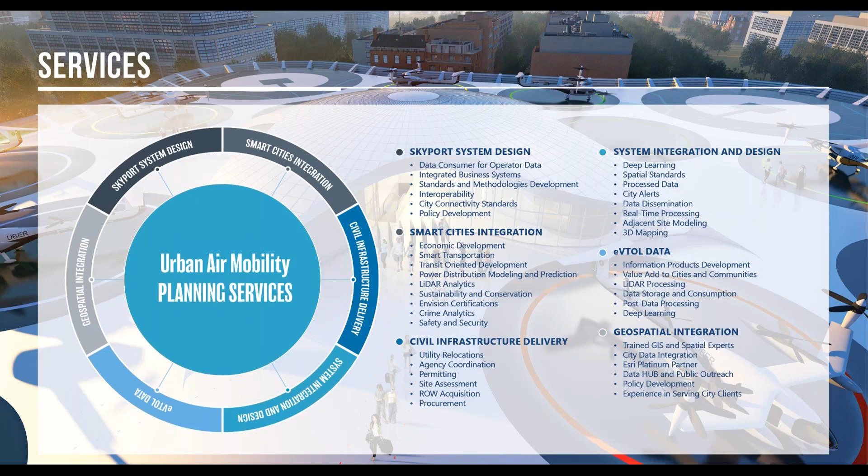Focusing on transportation and infrastructure, we are excited to be part of this transportation revolution. As a trailblazer in urban air mobility infrastructure, we offer developers, transportation authorities, and eVTOL operators a design partnership that can help make this emerging industry possible. Our solutions are designed to be flexible and modular while maximizing safety, sustainability, and passenger comfort. We design with smart components that promote efficiency and integrate into smart city plans for the future. We're proud to be thought leaders in reshaping our communities for the better.

So in the past I've discussed some of the life safety codes, the HVAC, the electrical, and fire protection systems that may affect vertiport designs. In this presentation, I plan to highlight some of the building code considerations.

Please note that building codes are adopted by each jurisdiction, and any community may choose to adopt different editions or apply more stringent requirements than the latest IBC edition. The current version of the IBC is 2018. Not all states have adopted the 2018 version, but all states have adopted most parts of some version of IBC. There are about 15 states that have adopted the 2018 version, and that changes every year.

There are 35 chapters that cover materials, interiors, life safety, types of construction, elevators, plumbing, and many more. The important thing to note is that the IBC covers both prescriptive and performance-related requirements. In addition to the IBC, these are some of the other code agencies that may develop prescriptive or performance-based standards for the design of building systems.

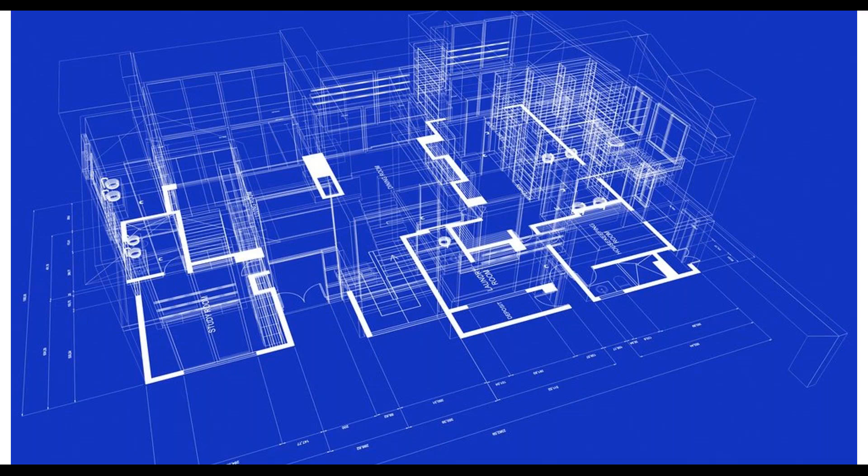Evaluating those same conditions and modifying an existing building to meet those requirements will present a greater challenge. So questions like, if a building was built before 1990, it may not meet our current seismic requirements.

On October 17, 1989, the Loma Prieta earthquake struck near San Francisco. A 6.9 magnitude earthquake, it caused nearly $6 billion in property damage. And in 1990, the code agencies set to work redefining seismic requirements to reduce the impact of future earthquakes. So if you take a look around and consider how much of our built environment was constructed before 1990, you'll see that it exceeds the construction in the 30 years since.

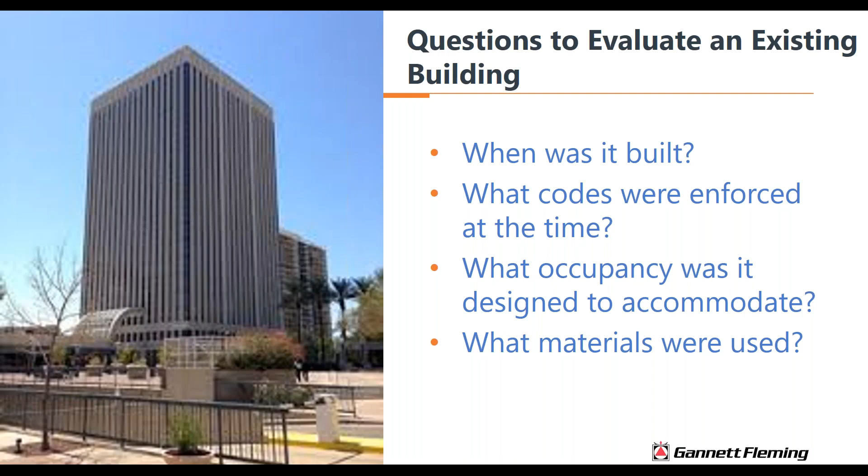So let's get into some of the specific IBC sections. According to the 1968 building code, a high-rise structure was any building at least 75 feet in height measured from the curb. According to the Encyclopedia Britannica, a high-rise building is any building tall enough to require the use of an elevator. Still, other definitions classify anything less than 115 feet as a low-rise. But since we're following the IBC, per the 2018 IBC, a high-rise must have an occupied floor at least 75 feet above the lowest level of fire department access, and not more than 420 feet, because anything over 420 feet is a super high-rise that has a different set of rules.

From some of the things we've heard about eVTOL operation in urban downtown centers, to reduce wind shear and influence, a vertipad may need to be installed at least 10 feet above the top of the existing rooftop. So if we assume that battery storage and mechanical systems are installed on an existing converted floor somewhere below the vertipad, the decisions about placement of the terminal space, where do you want the passengers gathered? Would it be immediately on top of the roof? Will it be elevated like the vertipad? All of these decisions will affect the height and will be in some way modified and controlled by the building codes.

A quick shout out here to zoning ordinances. While not in the building code, zoning ordinances are written by local jurisdictions to regulate how properties can be used. Things like lot size, building density, noise, and heights of structures are controlled by local municipal governments. The building code suggests how to build safely, but the local zoning will dictate how tall is too tall.

So from an IBC perspective, adding additional floors might require modifications to fire pumps, sprinkler systems, alarms, and electrical wiring, and these can all be very costly and may affect the entire building. But they can be worked out for the right price. Navigating local zoning codes may present an entirely different type of political challenge.

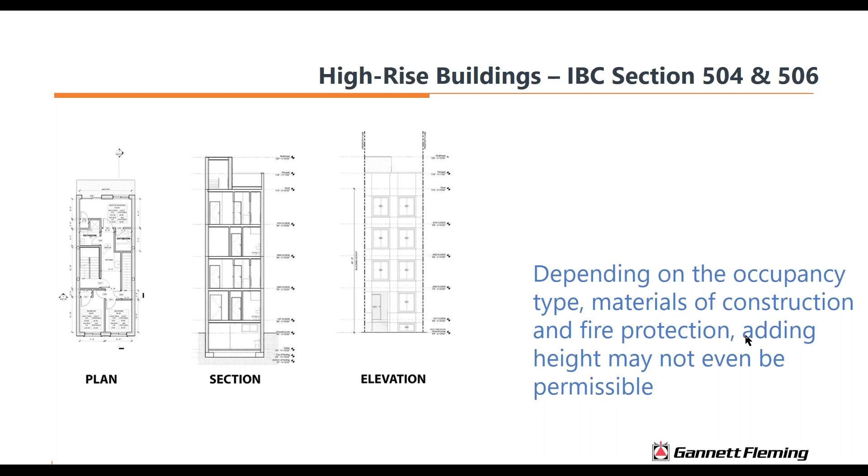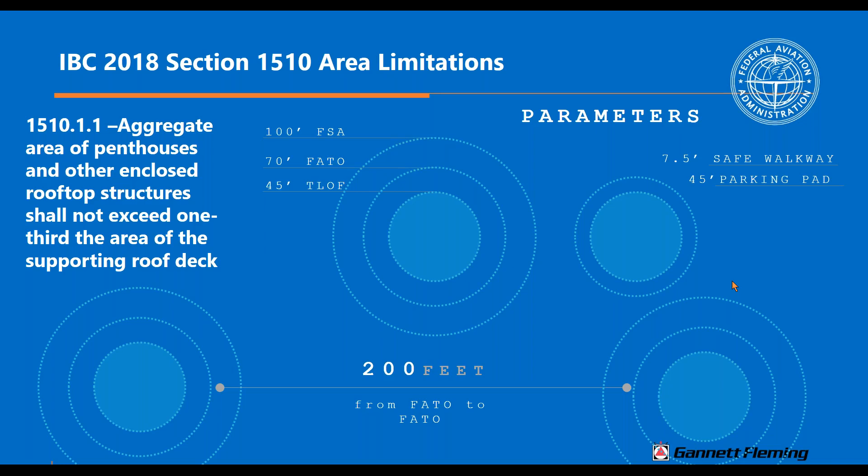And if we want to talk about adding height or additional occupied space to the top of an existing building, we look at IBC section 1510: the aggregate area of penthouses and other enclosed rooftop structures shall not exceed one third of the area of the supporting roof deck. So what does that mean for us?

If we consider one FATO with, let's say, a 100-foot diameter for the flight safety area, and 3 parking charging pads per FATO, plus a passenger terminal that could easily reach 2,500 square feet, now we've taken up 16,848 square feet. So the minimum size roof that could accommodate a single landing must be at least 50,500 square feet. That's a building with a rooftop footprint of around 250 by 200. It's not outrageous, but might be bigger than what you were originally envisioning.

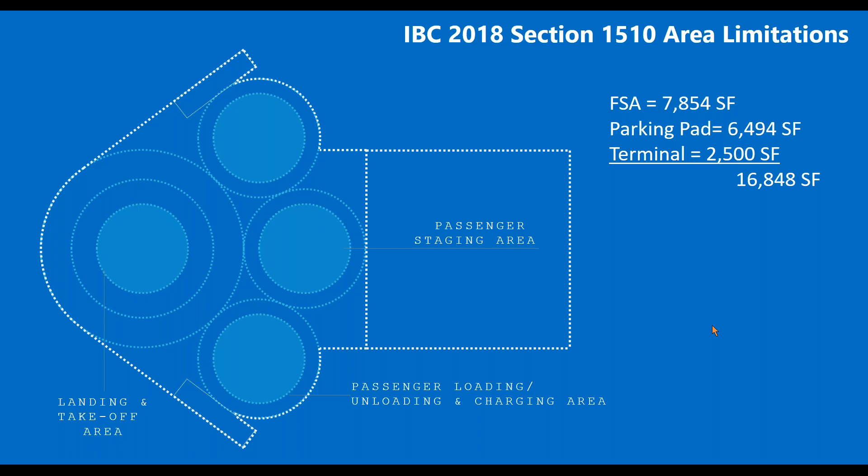Talking about building egress is another important consideration. Building egress, or how we evacuate, is designed based on the maximum occupant loading of the most utilized floor. So when building use or occupancy loading changes, or if the vertiport and terminal loading is greater than the original design, we have to reevaluate the means of evacuation for compliance. We need to evaluate if we can get enough people, the anticipated number of people, out of the building safely in the event something should happen.

So items that we would have to look at include the egress path width for the doors and the stairs, the accessibility to those areas of evacuation, areas of refuge where people might have to wait for first responders, and fire ratings of the exit passageways.

So just to give you a little bit of background on this, the current code dictates that an airport terminal use an occupancy loading of 100 square feet per person in a concourse area and 15 square feet per person in a waiting area. So if you think about it, when you're about to board your plane, people kind of jam up together a little bit. Everybody gets a little bit closer. You don't require as much space. So the density and loading of that area increases. But it's based on how much of that building is classified as the waiting space versus how much is classified as a concourse area.

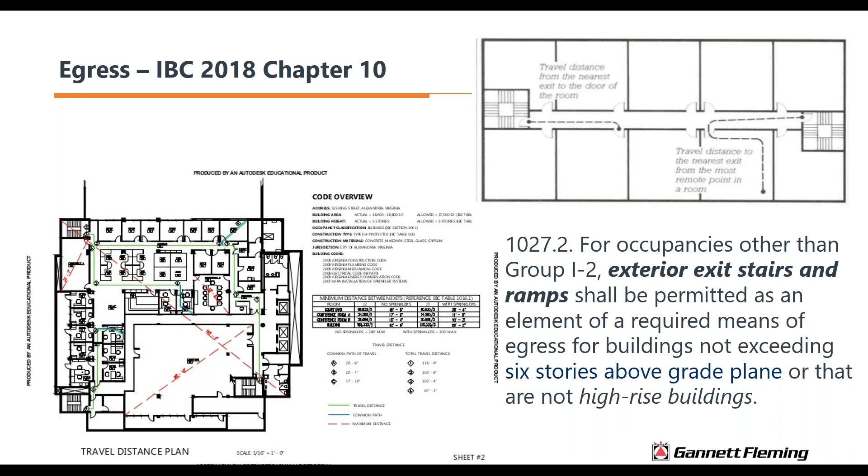Another example where understanding the history of the building comes into play, the Americans with Disabilities Act was signed into law in 1990. So prior to 1990, it was the decision of the building owner to include provisions for building access for those with disabilities. It was probably a financial decision. But providing ADA accessibility is a federal law. The building code describes how to achieve compliance with the law.

So with a renovation project where you're trying to retrofit new facilities into an existing building, there may be situations where complying with the law is just not possible. It's just technically infeasible. We cannot do it. In all other situations, the building owners are at risk for non-compliance. Building code is different from the law. You may be code compliant and not legally compliant.

So under the building code, they require that you spend 20% of the cost of an interior renovation project on ADA compliance and helping to bring the building into compliance. But per the federal law, building owners were given 30 years to make their buildings fully compliant, and they don't really have a tolerance for we're partially compliant. So just because you've changed the height of a water fountain or you've added automated door openers to one part of a building does not mean that your building fully complies with the law.

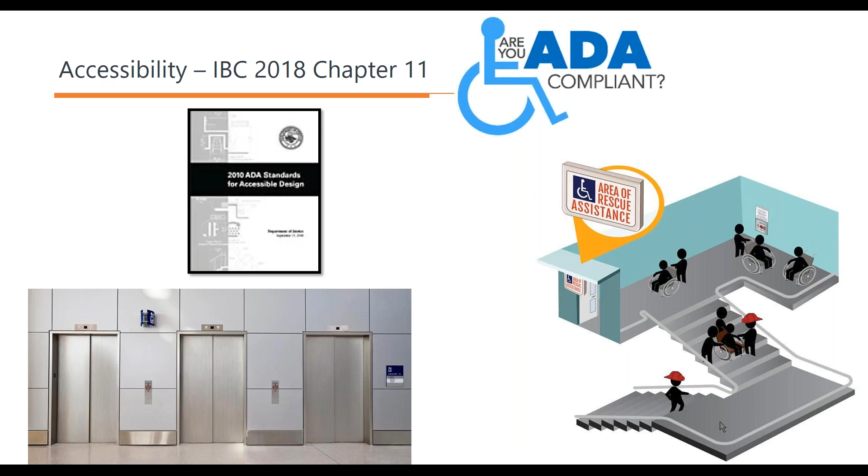Mixed-use buildings are not a new concept. Combining the spaces where we live, work, and play into one space has been part of urban planning since we first started building settlements. But recently, we've seen a resurgence of mixed-use developments to capitalize on the benefits of affordable housing, walkable neighborhoods, better land use, and improved community identity.

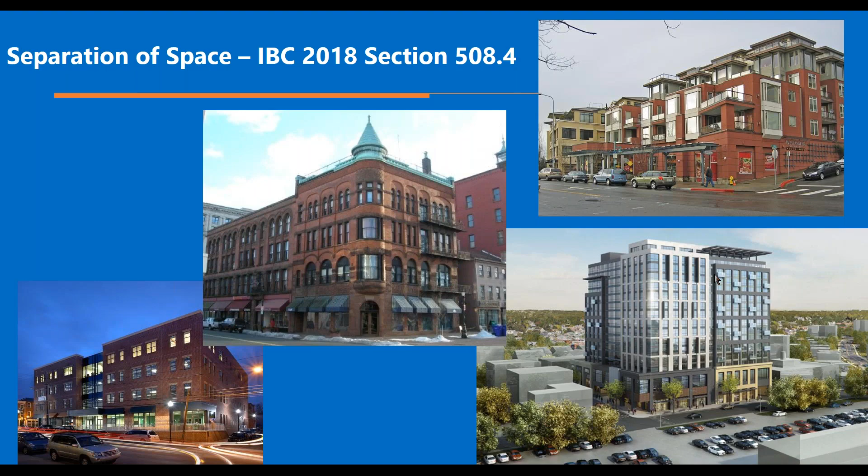Fire separations indicate how the floors and walls between each classified space shall be constructed. So spaces with a similar use may be considered non-separated spaces. So what does that mean? That means if you have one floor that is all classified as office space, that the risks to the occupants of that floor are all the same, and you would be protected as one unified space. However, if you have spaces that are adjacent to each other with a different classification, let's say you took one far end closet and decided to store hazardous materials and batteries there, you would want to protect the office space from the hazardous classified space.

And those types of classifications may require separation in accordance with IBC 2018 Table 508.4. So increasing the fire rating of a floor construction is a way to meet minimum separation distances, and you can have separation requirements between floors vertically and within a floor horizontal separation spaces. So horizontal separation might protect a mechanical space and emergency exits from other types of use cases.

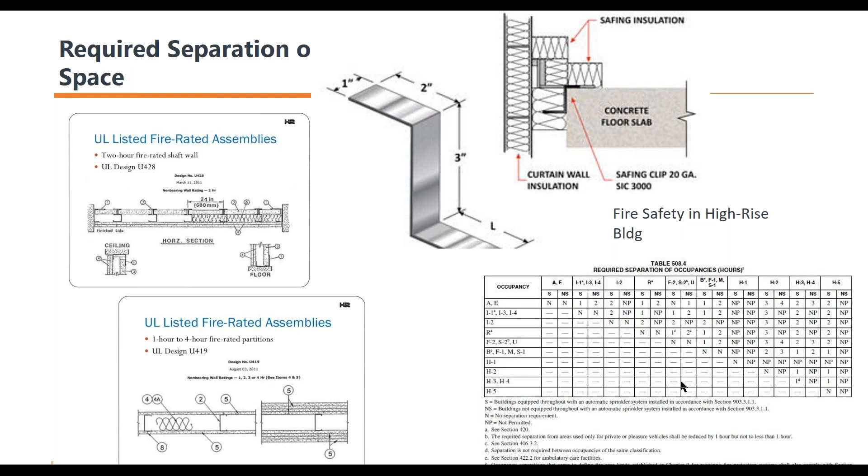If we want to talk about Chapter 16 and some structural considerations: an ordinary flat pitched roof that is not an occupied space and not designed to be one may be designed for 20 PSF uniform live load, while an occupied roof, something like a roof garden or a space where people are designed to assemble and congregate, may be designed for 100 PSF uniform live load. Different places in the country might have additional snow loads to consider.

Per the IBC, helicopter landing and parking pads are designed based on the takeoff weight of the vehicle, which is either 40 or 60 PSF minimum per the code.

So if we were to take, for example, a 6,000 pound eVTOL distributed over a 1,500 square foot vertipad, that gives us a 4 PSF uniform loading, which would be distributed on top of the roof. But as we mentioned before, due to wind influence, we are not looking to install directly atop the roof. And per the code, I'm not allowed to use 4 PSF in my calculations because the IBC mandates that I use 60 PSF.

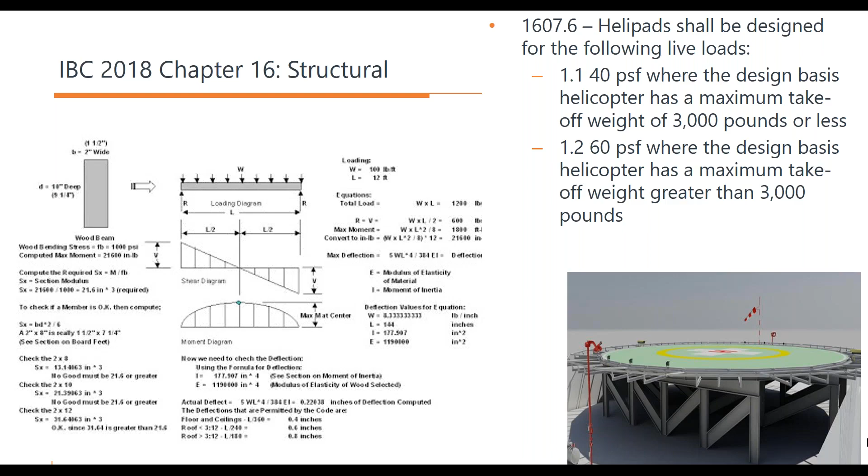Other considerations: the International Green Construction Code is part of the International Code Council family of codes, like the IBC and the IFC. The IGCC regulates construction of new and existing commercial buildings to decrease negative impacts of construction and promote the benefits of good design principles. It is a whole building system approach to construction, which focuses on building better indoor environments, lowering the impact to natural resources, and overall improving neighborhood connectivity.

You may notice that California is not highlighted green as one of the 14 states that has adopted the IGCC.

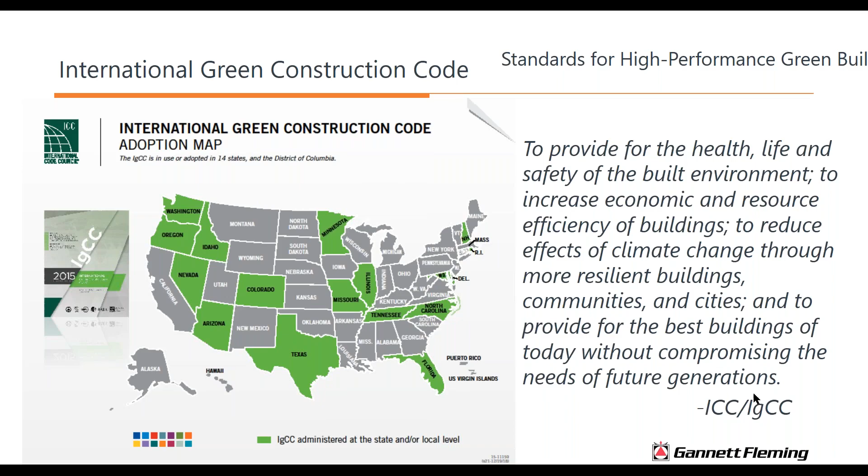Rest assured, they do have their own green building standards that apply to new construction and renovations and alterations of existing buildings. It was created in 2007.

CalGreen was adopted to address 5 divisions of building construction, including planning and design, energy efficiency, water efficiency and conservation, material conservation, resource efficiency, and environmental quality. These are codes that all must be met and satisfied in addition to the strictly IBC codes for building construction and use.

So in wrap up, just a few points to remember. Any opinions expressed in this presentation are educated best guesses, because the codes do not recognize vertipads as building structures or components of buildings, nor do we have a stable of sample vertipads that have been accepted and built that a code official could refer to.

This should not be considered all inclusive. There are 35 chapters. I've only hit on a few of the items that you may want to consider as you're starting to look at different types of buildings for your vertipad network. As the designs for a functional vertiport emerge and evolve, they may trigger other sections in the IBC that were not discussed in this presentation.

The first thing to understand going into this is that no matter where we look or go, there are primarily two major building code documents published and in use in some form or edition: the ICC's International Building Code, or the National Fire Protection Association's NFPA 5000 Building Safety Code, and that's where Teresa spent most of her discussion.

Looking at fire safety and operational safety for processes within those structures, we would find those requirements generally in either the International Fire Code or NFPA's fire code document known as NFPA 1. Again, depending upon where we go, in whole or in part, with modification or some addition, some version is likely in effect.

The most important takeaway at this moment is that none of those documents specifically address electric vertical takeoff operations. We are discussing something today that doesn't actually appear in those documents.

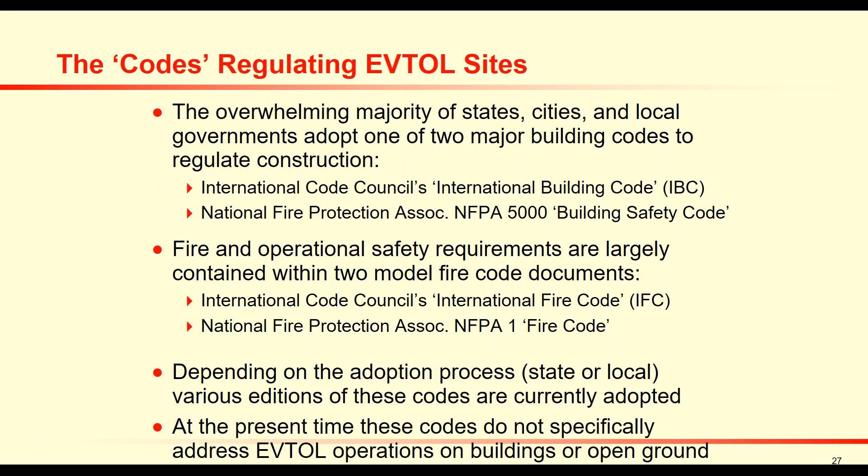And so that raises the first concept or the first question that emerging technologies face when it comes to building and fire codes. That is, when we're talking about something that doesn't yet exist, how do those codes answer or address that? The reality is there are three possible manners in which your situation or your emerging technology could be answered in any local municipality or by individual code officials.

Some may entertain it long enough to listen to what it's about, but still remain skeptical. And oftentimes you're told, when it's in the code, come back and we'll look at it, because they like to work from within the framework of what has made its way through the code process.

Just as a quick side story on that, we recently faced this concept with a fuel delivery business model where liquid fuel dispensed to consumer vehicles was being brought to the vehicles in a mobile environment. When that technology and business model first emerged, same situation - not contained in any of the codes in effect at that time. And so it resulted in some friction and some push-pull relationships between the business side and the public safety side.

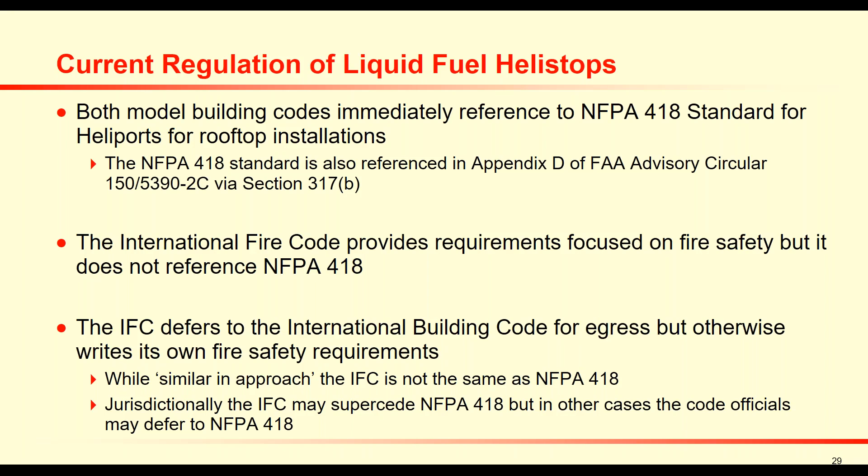So we have a building code sending us to an NFPA standard to discuss the physical and structural elements of a rooftop installation, and the companion fire code doesn't continue that cross-referencing, instead laying out through its own chapter a set of requirements. While they're similar between the International Fire Code and NFPA 418, they are not exactly the same. So we can get ourselves into a situation where in some jurisdictions one set of rules is being applied, and in another jurisdiction, other rules are being applied because the code pathway is not exactly harmonized.

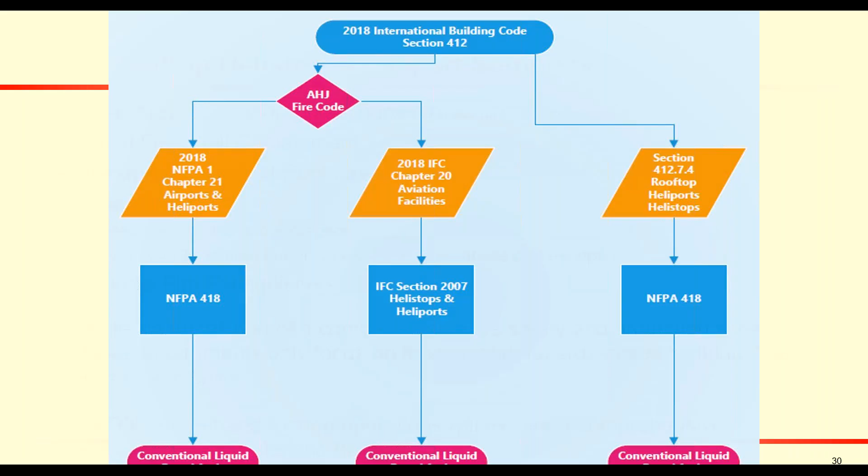Within the International Fire Code, their section for rooftop, helistop, and heliports breaks out into a few requirements. They have clear area requirements, essentially as an anti-collision measure. They require liquid fuel spill containment, which we'll talk about separately in a moment. Standpipe systems at rooftop levels are the firefighting method once we've dealt with blanketing the fuel source. Foam protection deals with that spilled fuel.

The IFC requires foam protection without exception. NFPA 418 has a bit different flavor on that, in that it requires foam protection, but in smaller or lower risk applications, it provides other alternatives and exceptions. That's an example of the disconnect there. And portable fire extinguishers, which we'll talk about separately as well.

So we're looking at this comprehensive protection methodology. However, when you get down to it, almost everything is based on the risk and hazard of liquid fuel aircraft and liquid fuel spills and discharges. And that simply doesn't fit into the picture of the EV operation.

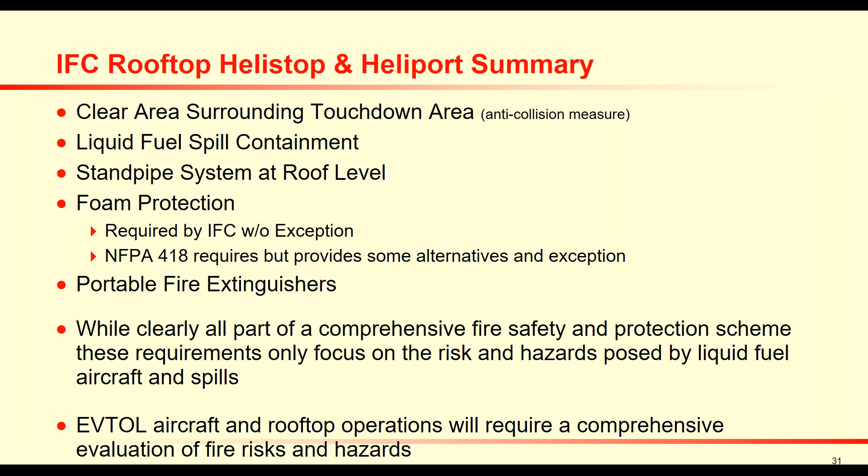In the containment language, we're very focused currently on spills and discharges of fuel, because the idea of fuel cascading through a building subject to ignition is indeed a problem. But at the same time, if I'm going to build an EV-only site, do I really need to be worried about that? So even attempting to use the current code doesn't work at all with what the technology is bringing to us.

The standpipe requirement, which is the secondary firefighting support, the water-based support, is still a necessity. However we deal with the EV aircraft, we still have to deal with final extinguishment. So the requirement to bring the building standpipe to the roof level would still be applicable in either environment.

While we may not have to look at liquid containment if we're doing a dedicated electric site, we would still have to deal with the hazard of that fuel source. There's been a body of work, studies, and testing done with electric vehicles to understand how to best handle them when they catch fire and how to contain or allow them to burn out.

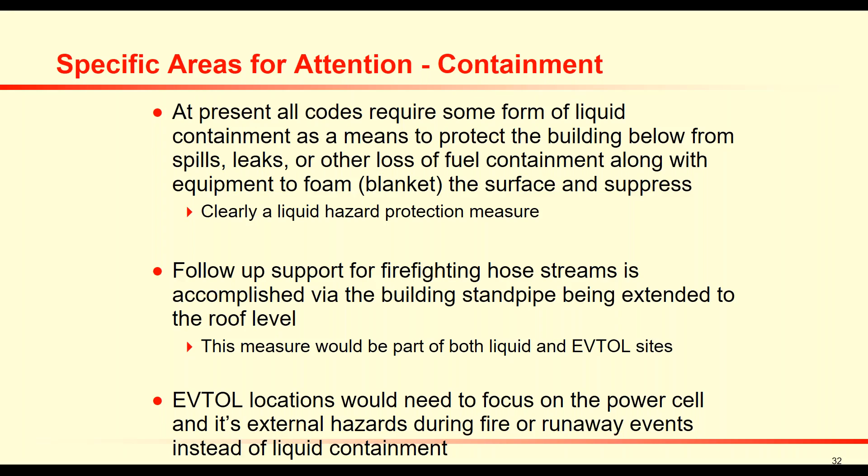But the dynamic changes between a curbside or highway event with an electric vehicle to now an EV aircraft on the roof of a building at basically any height, whether it's 3 or 4 stories or 50 or 60 or more stories, is an element that has to be looked at. While the body of work from electric vehicle battery fires and firefighting is understood and being refined, transposing that to a spot in the sky is a different environment that has to be looked at.

At present, the portable extinguisher rules for helistops and heliports rely on dry chemical agents with BC ratings. Without getting too deep into the science of how dry chemical agents extinguish fires, when we look at a BC rated dry chemical extinguisher compared to an ABC rated dry chemical extinguisher, or what is known as a multi-purpose extinguisher, there is a distinct difference there.

The BC rated dry chemical extinguisher is the preferred and actually code-specified type for current aircraft operations. That's driven by the fact that an ABC extinguisher interacts negatively with the aluminum and metallic parts, particularly the fasteners and rivets, on conventional aircraft.

When you have an aircraft that catches fire, or a fire adjacent to an aircraft at a terminal location, we understand that aircraft is going to be damaged already by the fire. But it's what happens when the agent is discharged and it potentially is carried to adjacent aircraft, either at a terminal or adjacent charging areas. That is the bigger problem, because it's exceptionally difficult to decontaminate the surfaces. So the BC dry chemical extinguisher has been the industry standard for that reason, to protect from the metal interaction and degradation.

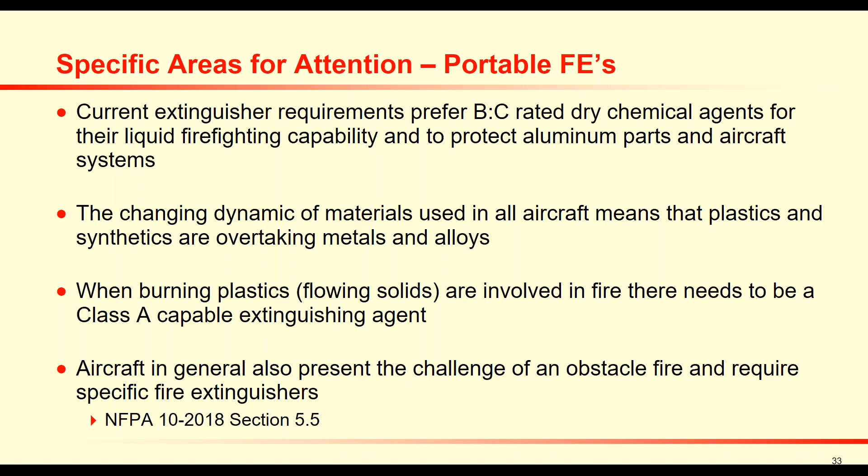This sets up a scenario, particularly where both types, liquid fueled and EV aircraft, can be co-located, because there's a bit of a conflicting interest there. That's a different element that needs to be looked at. We simply can't transpose extinguisher requirements at present to this environment without fully understanding what will be the fuels involved and how will they be burning.

Since there are no rules, and perhaps people participating right now have the ability to influence decisions down the road, here's a couple of other things to consider. Essentially none of this exists presently in the liquid fuel environment.

The ability to disconnect power to the equipment on the roof is obviously important. But what is more important is that it can be remotely disconnected from a point anywhere below the roof. We don't want to send responders directly onto the roof in order to access the disconnecting equipment. We don't know the extent of the problem on the roof, and bringing them onto that level to simply disconnect power could be a problem.

Disconnecting power is a way to eliminate hazards to the responders, but in an electric environment, it's also the way to kill the continuing application of energy, which can be further feeding or propagating that fire. So remote disconnection from below the roof level really needs to be looked at strongly.

We have technology now readily available to bring rooftop level video feeds to the emergency responders, whether it's done wirelessly—and in some jurisdictions they have this capability where they can receive video feed directly into apparatus and dispatch centers while en route—or, if the agency doesn't have that capability, the ability to view that video feed from the ground level, from a lobby or from some other fire command center or fire command room on the premise.

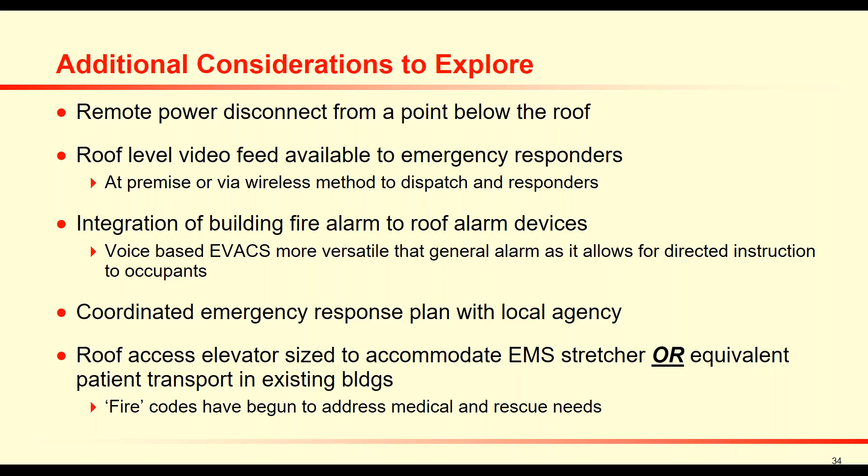As we start thinking about how we're going to get through this code pathway and what path to take, we need to understand that getting to code resolution will have multiple paths, because it's very difficult to lump new construction rules into a code process and then shoehorn them into existing buildings. It's probably beneficial to attack new and existing construction separately but concurrently, because some limitations will require other steps or alternatives.

We hopefully recognize that there is absolutely no benefit to applying liquid-based hazard protection in an exclusively EVTOL environment.

Then, running parallel and concurrently to this, is looking at adding EVTOL capability to an existing liquid-based helistop or heliport. It sounds good because we're just adding more aircraft or different types of aircraft to an existing facility, but we're introducing an entirely different set of hazards to a facility designed for an entirely different set of hazards. So we need to bridge that together and potentially apply both.

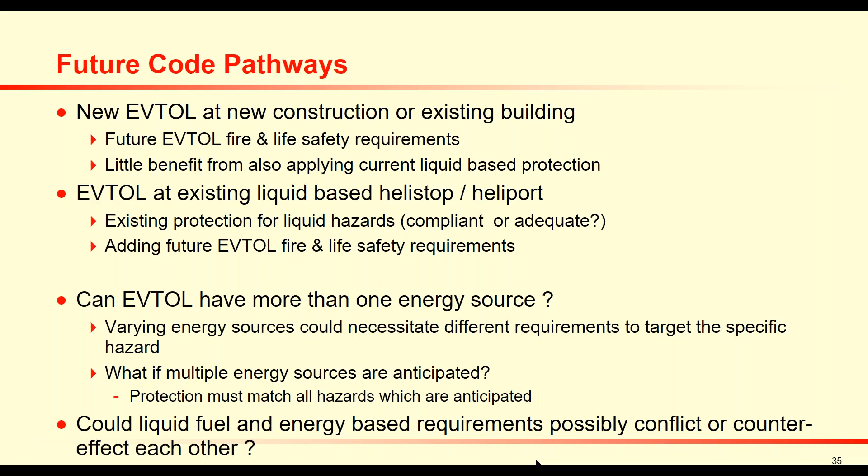So the first steps in this process toward preparing and presenting code language are everyone's understanding and embrace—not just people in the industry, but also the code environment and code development community—that liquid fuel aircraft operations are distinctly different than EVTOL operations. They may happen at the same location and serve the same overall need, but they are different. Therefore, the rules will be different and the approaches will be different as well.

Unfortunately, we don't have historical data we can rely upon to say this technology has been in use for X number of years, we've performed X number of flights, our rate of failure is this, our most frequently experienced mishap or loss event is this. We don't have any of that to work with. But that will end up being information sought as part of the process to develop the codes.

So we need to discuss, and in many cases test those theories by doing practical fire testing of the aircraft, the shell, the frame. We understand how batteries work and how batteries fail—that information can carry over. But if we introduce new energy technology that hasn't been previously looked at or tested, we're going to need to do that testing as well.

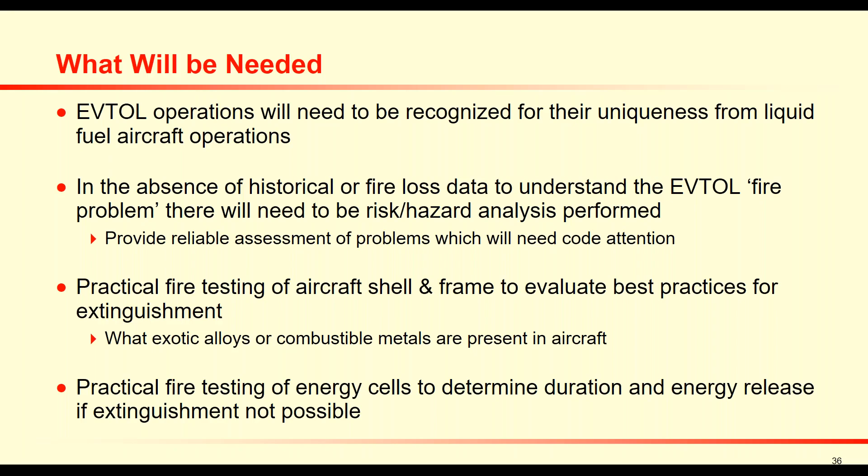And so the means to protect and the methods to suppress and respond to these fires are unknown, and someone is going to have to step in collectively and start looking at that. We understand that if the battery cells cannot be effectively extinguished and stopped, the approach is to let them burn, let them exhaust their energy until they become non-volatile. There's a time and energy release component that has to become part of the facility design. If we're going to let this essentially burn itself out, how long will that take, and what will be the energy released at peak and over time? I need to protect the building from what's happening around it if that's the true approach.

So that's my presentation, that's my information, and we'll probably have some questions. Rex, I'll turn it back to you.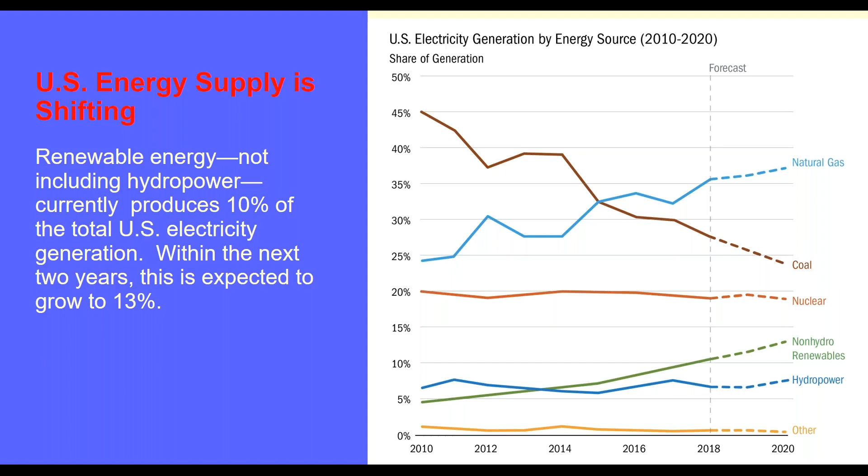So what we're seeing is that across the nation and across the world, there's an energy revolution underway. The 100-plus-year-old system is transitioning. Traditional sources of energy generation are shifting, and it primarily has to do with cost, is where it currently stands. We're seeing natural gas still trending up, coal trending down, and nuclear staying steady. But the trend we're seeing the most right now, a place where NREL spends a decent amount of time, is non-hydro renewables. It's increasing, and we're expecting the next 2 years to go from 10 to 13% of generation. Non-hydro is generally wind and solar.

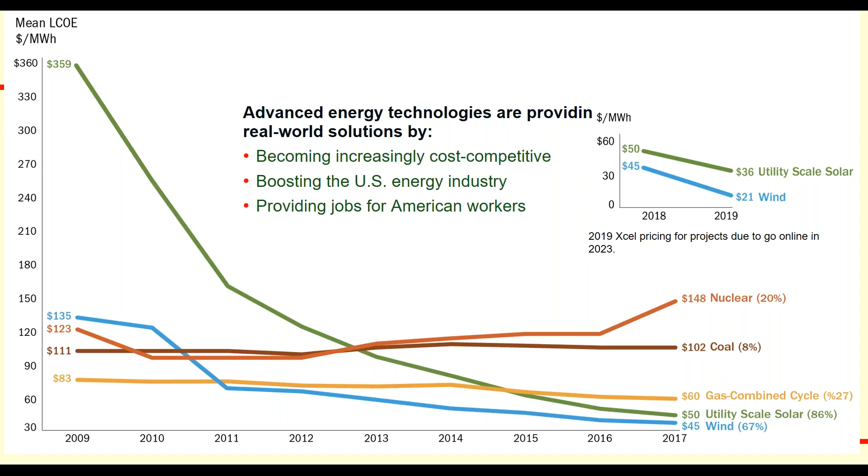Well, why does that matter? What's happening is that rather than having a fewer number of large generators to manage across 3 utility grids in the United States, we now could have 5,000, 8,000, 10,000 generators that have to be managed, and many of those are intermittent. A cloud goes over for solar, and it changes the amount of energy that comes off, say, a home rooftop. That decentralization requires better communications within the system, and we call that digitalization. With that digitalization, you have the opportunity to have what we call distributed energy resources, the batteries, the loads that you can call ahead and say, would you mind waiting a bit to take your energy from the system? We have a lull in the available generation, or now is a great time to fuel up your reserves.

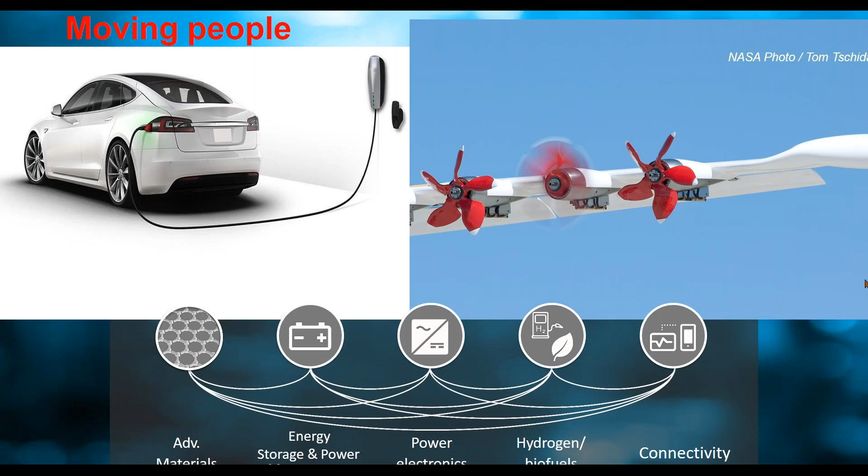As we get into moving goods, it's a very similar discussion. You start looking at how do we increase the capacity of those vehicles, the energy storage, where do you put it, how do you make that all work.

To give an example of some of the things that go into a typical system that we would look at, kind of on the early adopter or pre-code level, is how do you manage that system as a system?

Historically, it's been, I just need power, I go to the utility company, say thank you, there's a new feed that's provided. With the loads coming online, there could be years necessary to make the necessary upgrades to get to the locations that you need.

As we start to think through that, we start to say, okay, what about storage? And what about the size of the facility and the amount of energy that needs to be delivered? So storage becomes something to think about, along with potentially even using some of the resources on these diverse locations to essentially stabilize the grid as well and recharge back into the grid.

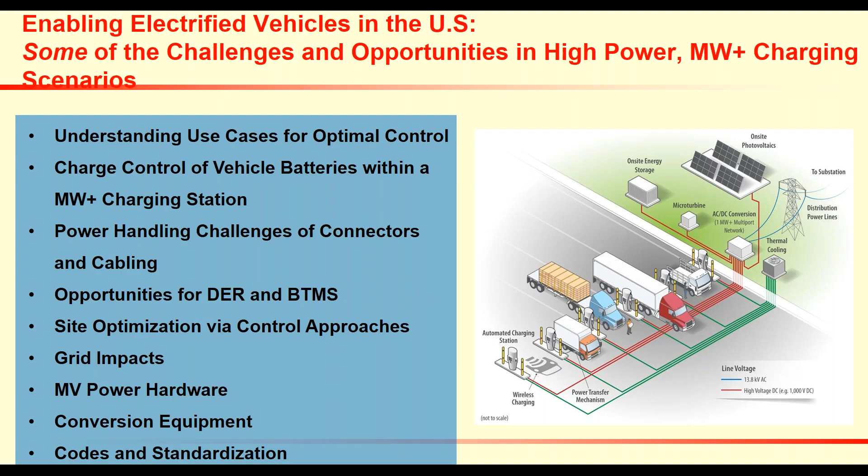We get into the mobility side of it. We talk about renewables and very similar things: grid integration, cybersecurity, and extreme fast charging.

What happens here is we are seeing these trends, and NREL as a national laboratory has been working with partners across the US and world to take on and provide some of the necessary research to bridge from university to implementation for many years.

We started with light duty vehicles and have spent some time with the Department of Defense on some of their heavier vehicles. Right now, the big push is on Class 8 and heavy-duty trucks, which have similar energy loads to urban air mobility.

They are choosing currently to go at lower charge rates than what we are hearing from industry within UAM. That's kind of the next challenge within aviation. The big question is trying to get the energy density up in those batteries, which is one of the big places we see.

The wave we see coming in, we're calling it the third wave in aviation, is urban air mobility, pilot training, and regional service for commercial service. Then hybrid systems that are currently in prototyping levels with multiple companies trying to use, or planning to use, electricity for takeoff and landing, and run potentially on a diesel engine or diesel-generated generator during flight.

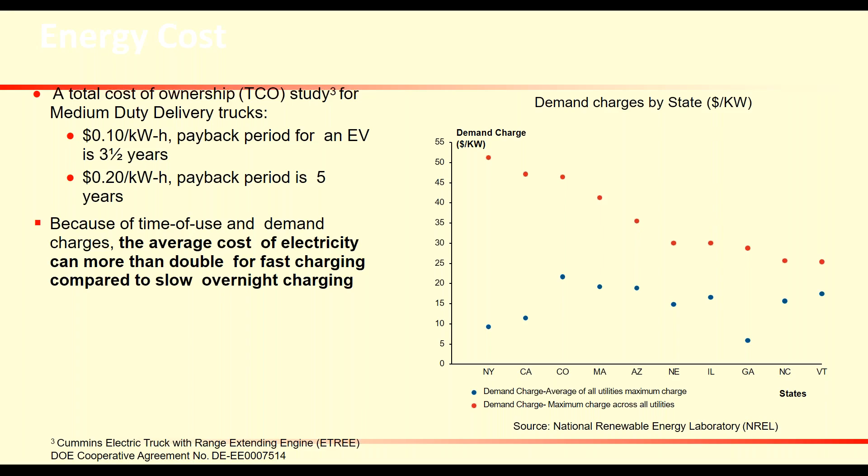That goes back to the question of energy storage and how you store that energy. There's active work going on right now within the national labs to work with utility providers and many equipment manufacturers to manage what we call behind-the-meter storage. You've probably heard things like choosing to run your dishwasher late at night—that's a choice someone can make. Or there are some utility providers that have methods to defer or cycle air conditioners during high load situations.

This takes us a step further and tries not to just have prescriptive or rough models, but to actively work with distributed resources—in many cases owned by municipalities and others outside your typical utility providers—to manage loads across the system.

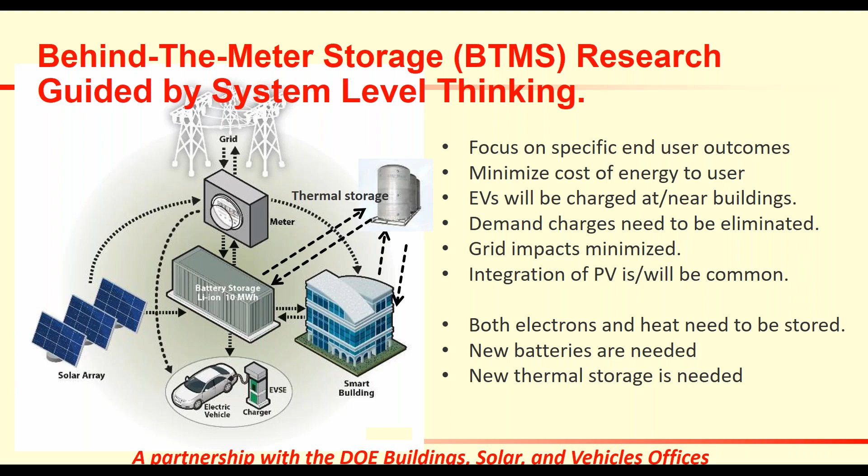The ideal situation, based on how grid performance works, is you want to lower those peaks or shift them—it's kind of ironic, but it's a similar phrase to flattening the curve. You want to spread those out. It makes the generation match the demand and reduces the need for storage.

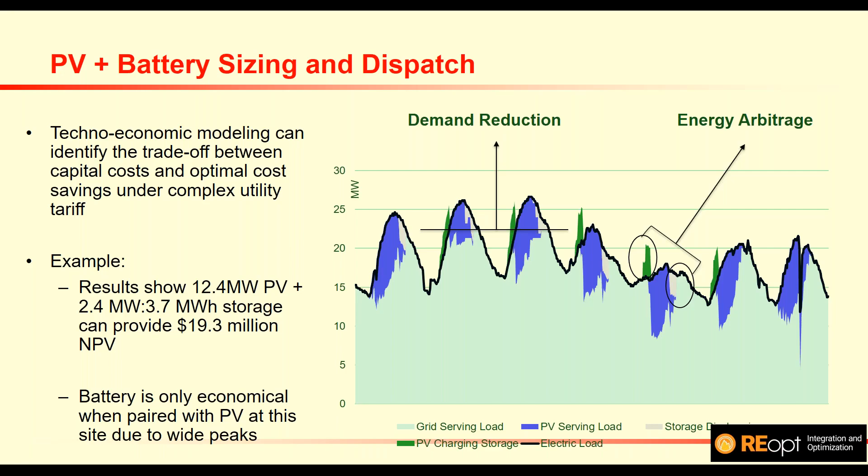One way we're seeing to potentially balance some of these items is that excess electricity generation, say during the day from renewables, can be utilized to help create biofuels and also generate hydrogen for storage, providing cyclical storage. Pumped hydro is another place where that works.

So you use your available energy during the day to store energy in a different fashion than a battery necessarily, depending on what's the best choice for that situation, and then utilize that energy later. Ideally you put it into a form that is stable, long-term stable, for your use later.

Some of these systems already exist. To give you an idea, the picture at the top is actually an organism that breaks down plastic bottles to create sustainable aviation fuel. The bottom half is actually a hydrogen fuel cell. We actually have in the lab another fuel cell from Daimler that's running one of our supercomputers.

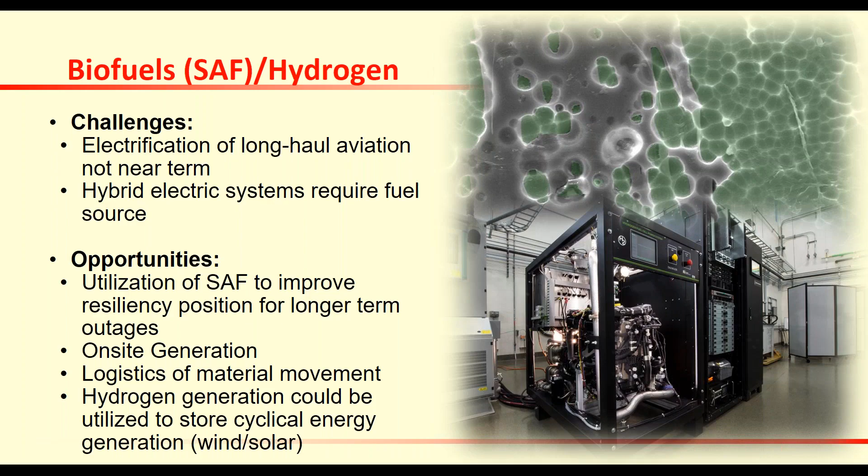So we have all these great opportunities to distribute how we're doing energy and different sources of energy, and be able to help manage our own systems. With that comes significant potential for energy system disruptions. Everybody can think about the hurricane that hits the southeast of the United States and takes down power lines. It's a minor threat, but it does occur related to solar flares—a real low probability, but real occurrence.

When we get into physical threats, there's the electromagnetic pulse discussion related to large-scale conflicts in the world. And there are cyber threats.

The Department of Energy has realized that within this, there are some significant places that need attention, and we're working to manage this system. When you figure that half the world's population uses the internet, and it's projected there will be 125 billion devices connected to the internet by 2030.

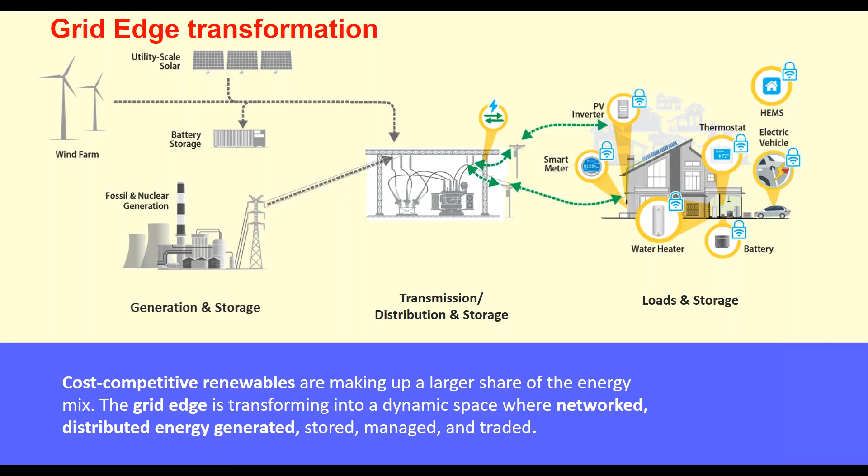So as we look at this, we've talked about cost-competitive renewables shifting in terms of available generation, and where we're seeing this is what we're calling the grid edge. We have a residential building in this graphic, but it's very similar to what we're talking about with a commercial building, urban air mobility, or even a small community. We're seeing smart meters, distributed energy loads managed in different ways, and that interaction from the transmission and distribution side into those facilities is going to be critically important to, one, reduce your cost, and improve the ability to deliver energy.

And we have a few things—there's working across the labs, a significant amount of information moving forward related to fast charging. We partner with multiple national laboratories and industries, including in this case Electrify America, ABB, and Tritium, on fast charging situations.

Last thing we're going to run through quickly is transformative technologies. As we work through connectivity, wireless charging, big data analytics, and deep learning, one thing NREL is looking at is efficiency—we worry about helping people be efficient. So part of that is not just what happens with the power, but how do we efficiently move vehicles, people, and cargo around an area.

Right now, one of the biggest programs we have going on is called Athena, in the DFW Metroplex. What Athena is doing is aggregating available data between the airport and local transportation to look at the patterns and flows of people into and out of the airport.

The focus, now that we're getting out of the early wins and into ongoing work, is to provide necessary data to help with operations and future planning. For example, at the Dallas airport, they are trying to optimize their rental shuttle buses right now, and they're trying to electrify those as well.

They just had a massive shift in their number of operations. So the first question that came out is, what can we do to provide the level of service we'd like to provide to our clients, our customers, our passengers, to move efficiently around the system?

The modeling is already in place based on their existing and historic data, and we shift some parameters within the computational sciences models. They're able to use that data to say, okay, we're going to go from 18 buses to 3 for the foreseeable future, for the next few months. And as the flight information keeps coming in showing that passengers are increasing, the number of shuttles will increase.

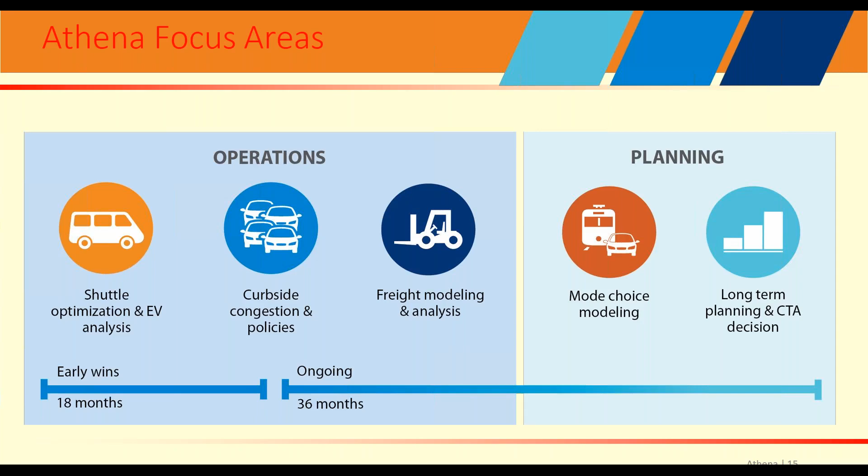That historically has not been something that's been able to be predictive. It's been primarily reactive. Past that, it gets into mode choices and long-term planning, where potentially you can have fewer facilities or smaller facilities because you're more readily adaptable to manage those queues and methods to move people.

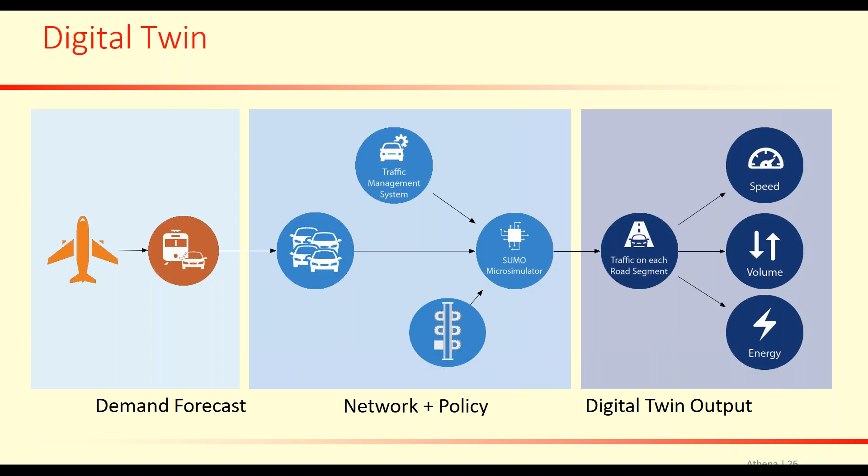To do this, what we're using is called a digital twin. We take the live data from the local municipality and transit agencies, Uber, and American Airlines, tie that all together, and then simulate it moving forward. We take that data to save and then predict from there. You can see what it then does is give you some demand forecasts.

Last few things, I think we're getting short on time. Just to give you an idea, NREL is collaborating in multiple areas across the nation and across the world, and is primarily focused on energy and efficiency.

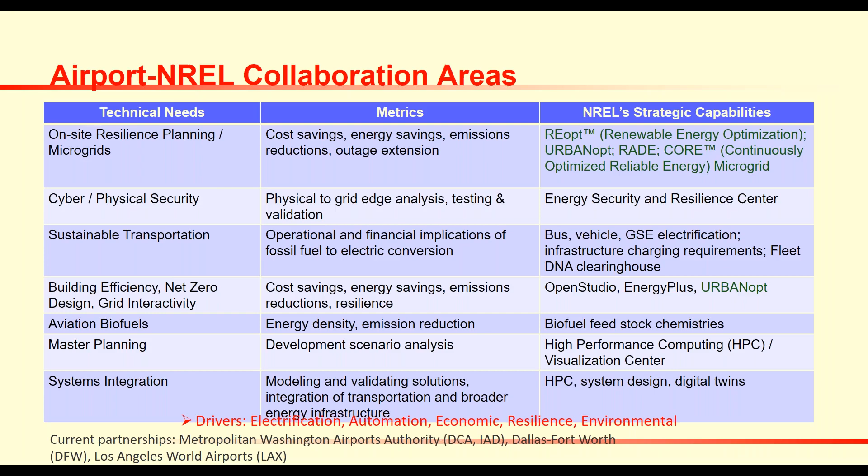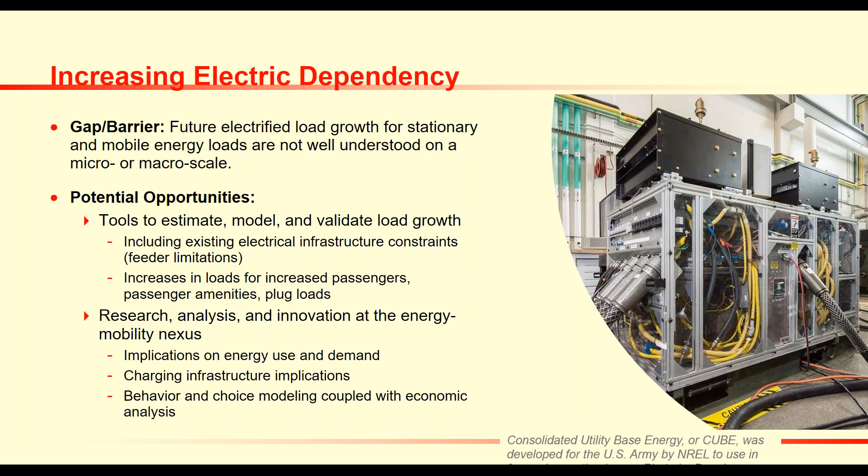We have some areas where we see gaps and barriers in research that we've been trying to make sure people are aware of. Some of those are in progress and working with different partners. We're seeing this increase in electrical dependency. We're also seeing a significant benefit in developing microgrids for survivability. If people would like to talk more about that, we can talk offline.

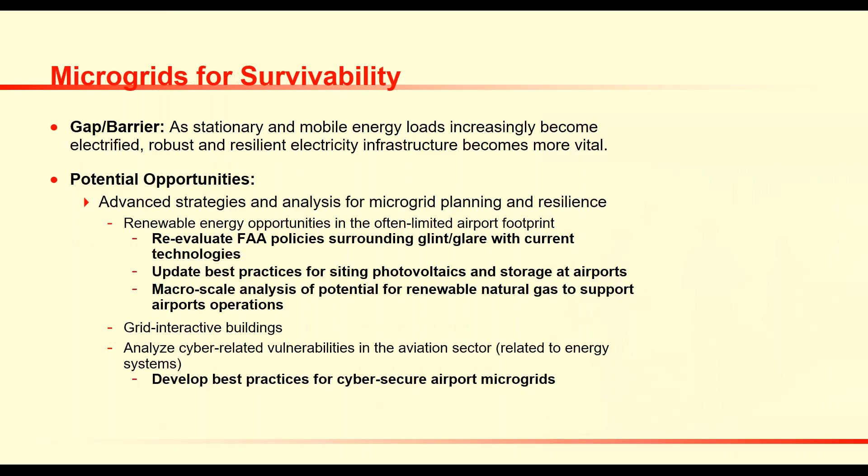With microgrids, there's a strong benefit in planning for resilience for key facilities, and that has to deal with some of the things we've already talked about. That continues.

Third-party financing: what is happening here is this is on the edge between utilities, historic municipalities, and private businesses. Trying to find third-party financing for some of these energy systems is a place where we're seeing significant work being accomplished, and a lot of effort has been made with Department of Defense and GSA moving that forward.

The last point is really trying to integrate data sets across the nation to help everyone move forward. We're finding that the data sets are sometimes difficult to get a hold of to be able to give good informed decisions, and that's moving forward.

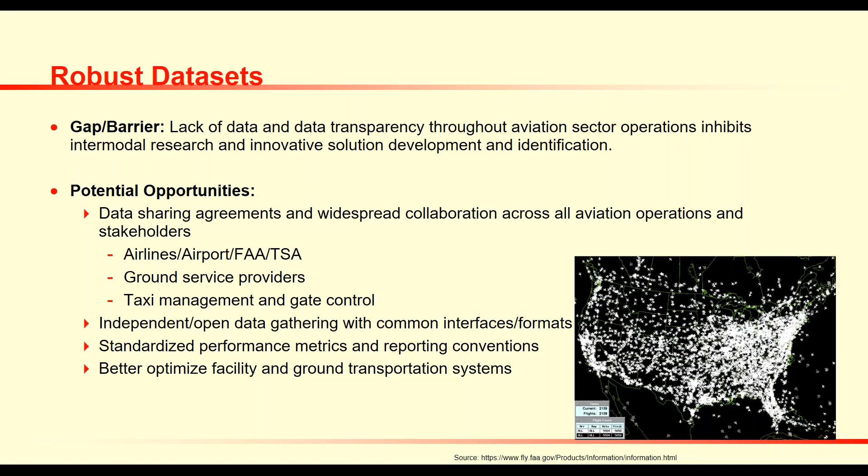Last thing we'll say is, as a national laboratory, we're out to help industry, academia, and government move forward their goals and take things from university into implementation. So we're actively looking for partners on a regular basis, and if there's anything we can help with, we'd love to help. Rex?

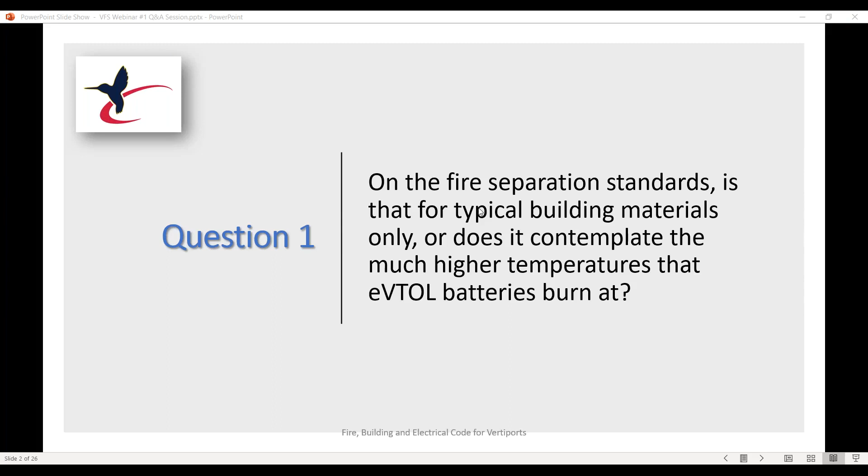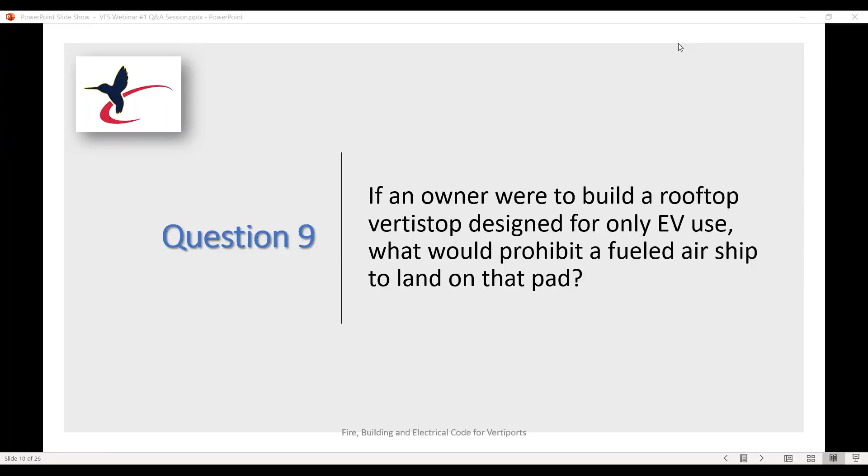Let me just get the screen back in my hands here. So just, oh, that's not what I wanted. Definitely not what I wanted. It's funny how I click something and that's not what came up. There we go. That's the one I wanted.